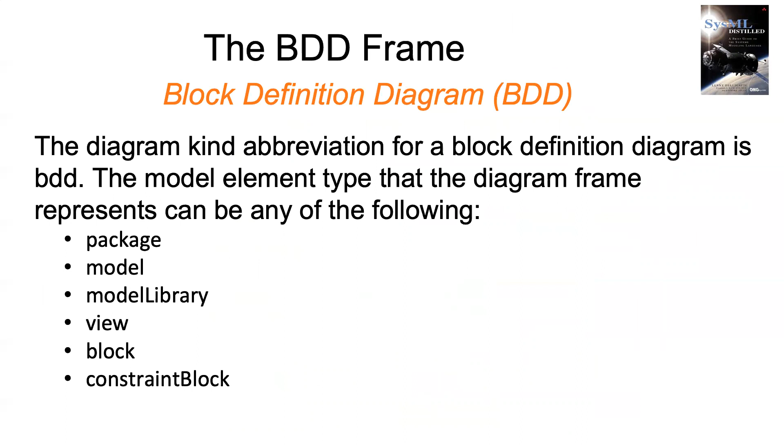A block definition diagram is used to display the properties and operations of blocks and the relationships between blocks. Common uses for BDDs include displaying system hierarchy trees and classification trees. The diagram kind abbreviation for a block diagram is BDD. The model element types for the diagram frame are package, model library, view, block, and constraint block.

So here is a high-level simplified BDD for the DellSat-77 that Delligatti has from his website, tied into what he has in the SysML Distilled textbook.

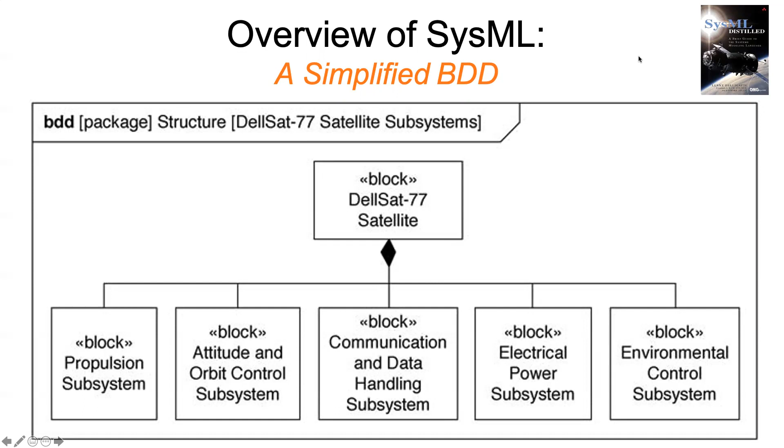And here are yet some other examples of the types of things that you could annotate with a block definition diagram.

Here are yet some other examples, going back to the DellSat-77. One is the structure, and we have a couple different ways of how that is represented here. This is the satellite structures and properties, and this is the structure trying to show a hierarchical view.

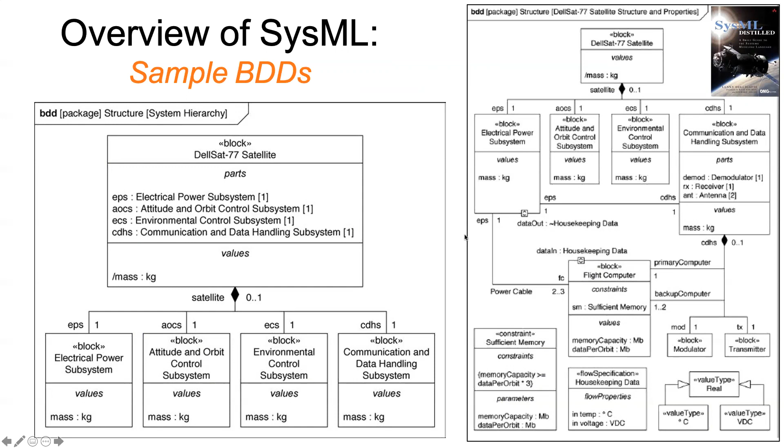And yet some other examples, I'll just skip over this, but these are other types of satellite-based structures that are used and shown in SysML notation.

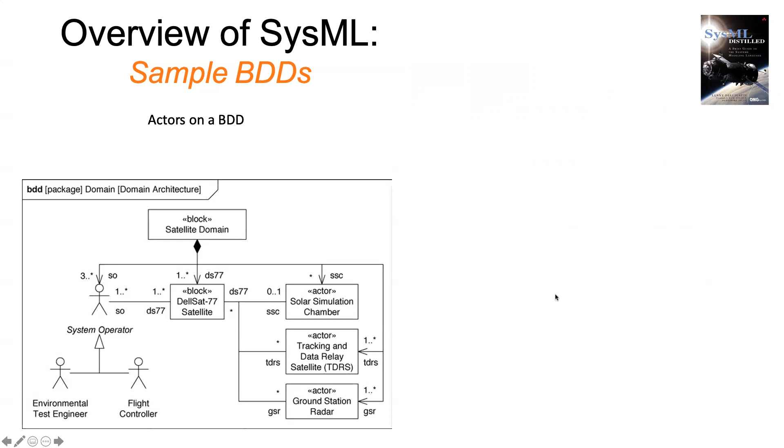You can also include actors in a BDD, and so here we're showing that. That may be something that would be useful to include for the way that you're trying to communicate and show the details of a specific design.

So for a summary of SysML, this is from SysML Distilled. BDD diagrams communicate structural information about a system. BDDs enable expressions of the structure type that exists internally within a system and externally in a system environment.

BDDs also express the type of services each structure provides and requires, the type of constraints each structure must conform to, and the type of values that exist within an operational system.

Generalization relationships between elements allow for defining type hierarchies and design to abstractions. This is a powerful design technique that creates extensibility in system design by decoupling the clients of services from specific implementations of a provider of those services. As the stakeholders' requirements evolve over time, one can modify existing providers or add new ones with minimal impact on the rest of the system design.

For an internal block diagram, it's used to capture the internal structure of a block, specifically its part properties and reference properties, and the connectors between those properties. An IBD always represents the internal structure of a single block.

So here is an illustration of an internal block diagram, once again for a satellite system, and this would be for a power subsystem.

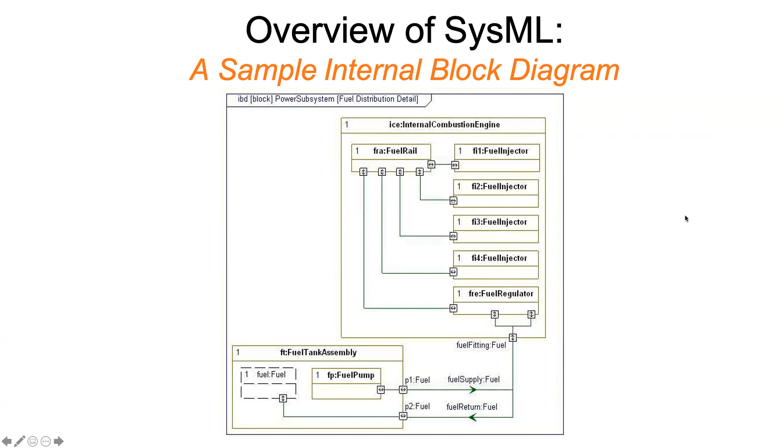Going back to the SysML, some of the things here—this is an internal block diagram for the satellite system that Delligatti has defined. And so this just shows you how that would work.

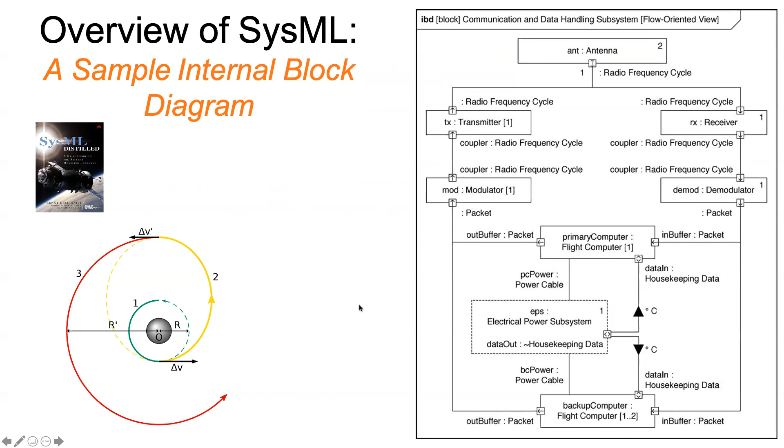Here is yet another example, a structure for a subset of blocks necessary for an IBD. The blocks necessary for an IBD of a communication data handling subsystem are shown here. This is one of the major subsystems that you would have in a satellite.

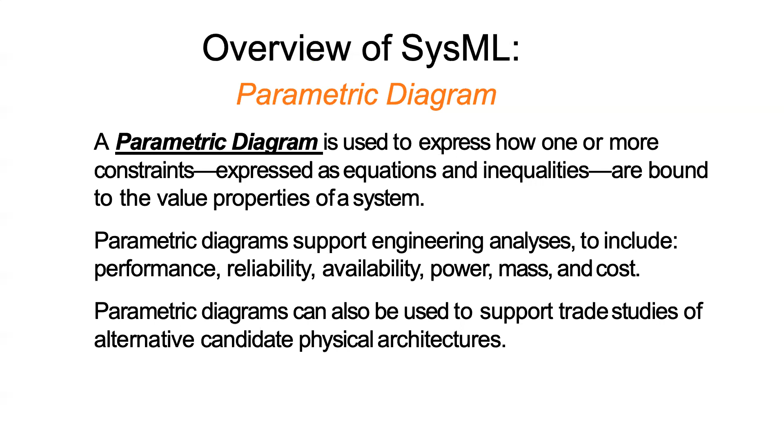A parametric diagram is used to express how one or more constraints, expressed as equations and inequalities, are bound to the value properties of a system. Parametric diagrams support engineering analysis to include performance, reliability, availability, power, mass, and cost. Parametric diagrams can also be used to support trade studies of alternative candidate physical architectures.

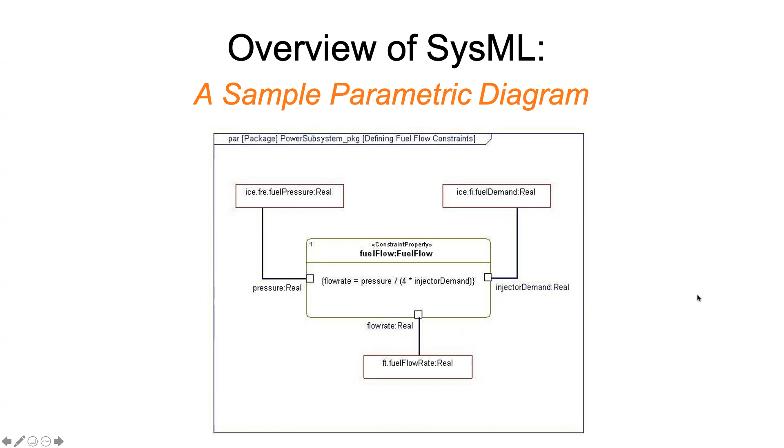A use case diagram is used to convey the use cases that a system performs and the actors that invoke and participate in those use cases. A use case diagram is a black box view of the services that a system performs in collaboration with others, so you're trying to see how the system is used in different scenarios.

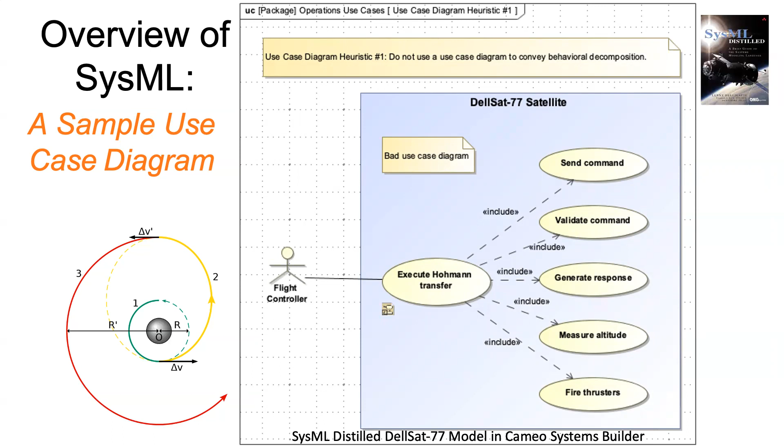Here's just another example, and this is for another one that is contained in the DellSat-77 model, and this is actually a view that I pulled out from when I was looking at the model in Cameo Systems Builder.

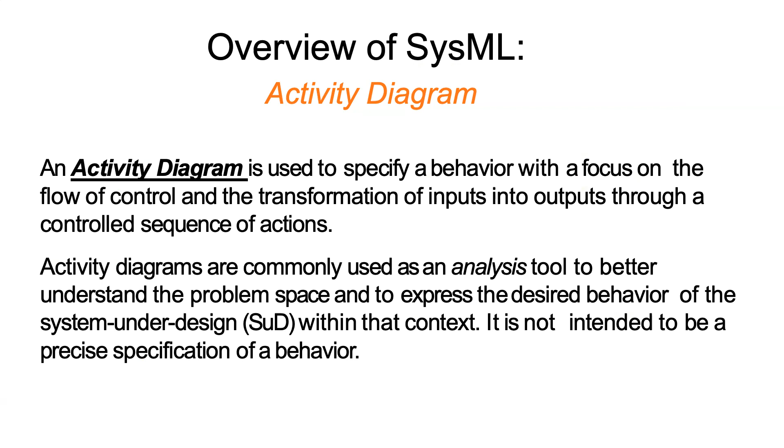An activity diagram is used to specify a behavior with a focus on the flow of control and the transformation of inputs into outputs through a controlled sequence of actions. Activity diagrams are commonly used as an analysis tool to better understand the problem space and to express the desired behavior of the system under design within that context. It is not intended to be a precise specification of behavior. So what communicates with what is a temporal flow of those things.

A sequence diagram is used to specify a behavior with a focus on how the parts of a block interact with one another via operation calls and asynchronous signals. Sequence diagrams are commonly used as a detailed design tool to precisely specify behavior as the input to the development stage of the life cycle. Sequence diagrams are also an excellent mechanism for specifying test cases.

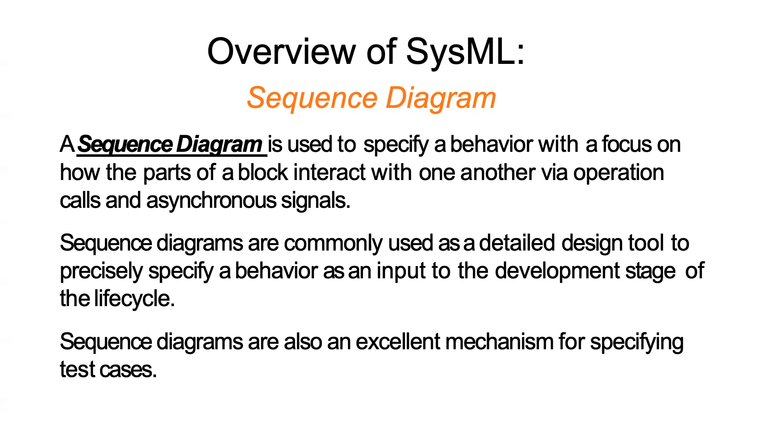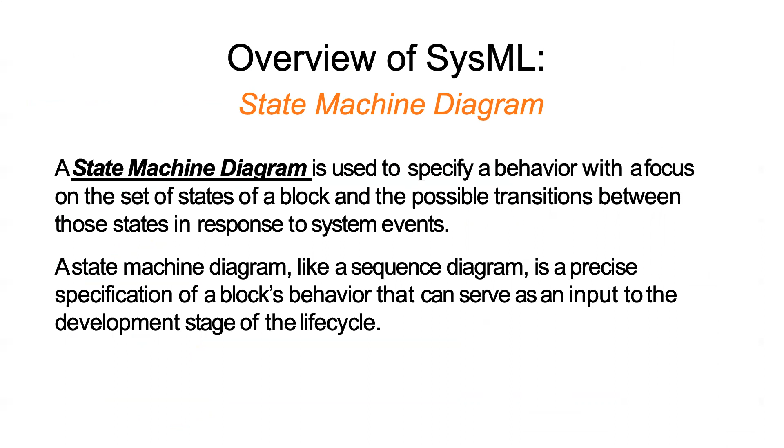For the state machine diagram, a state machine diagram is used to specify behavior with a focus on the set of states of a block and the possible transitions between those states in response to a system event. A state machine diagram, like a sequence diagram, is a precise specification of a block's behavior that can serve as an input to the development stage of the life cycle.

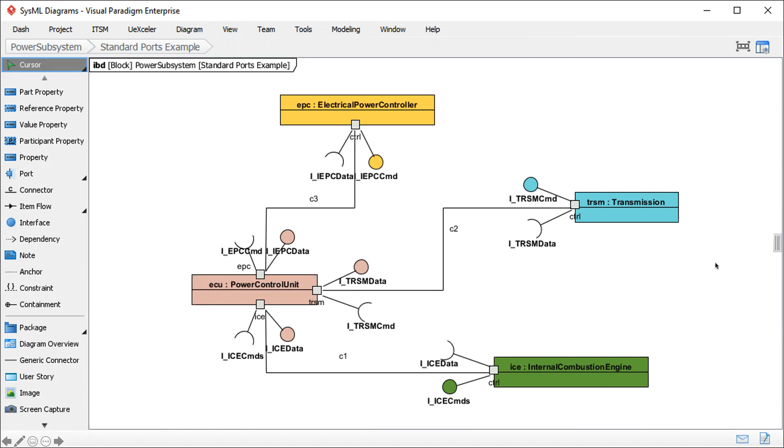For the internal block diagram, this is where we take a deeper look into a specific part of the design. Here is an example of that, where we have, say, a power subsystem with the electrical power controller, the power control unit, and other types of elements that are either inputs or outputs, connectors, as we're showing here, by each one of those elements in this diagram.

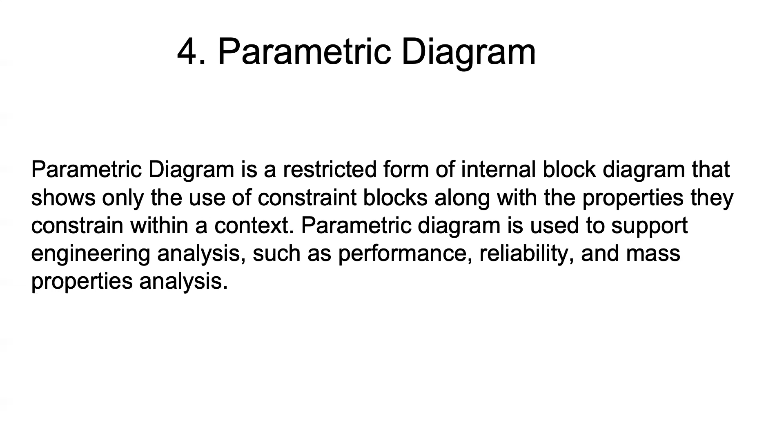For parametric diagrams, this is where we show the constraint blocks and the properties in which they perform. There are equations and physical realities that we're talking about, and this is helpful for engineering analysis. Here is an example for a power subsystem, showing a flow regulation of how much pressure can actually be passed through. We can see that these would be the physical quantities that we're embracing with this part of the design.

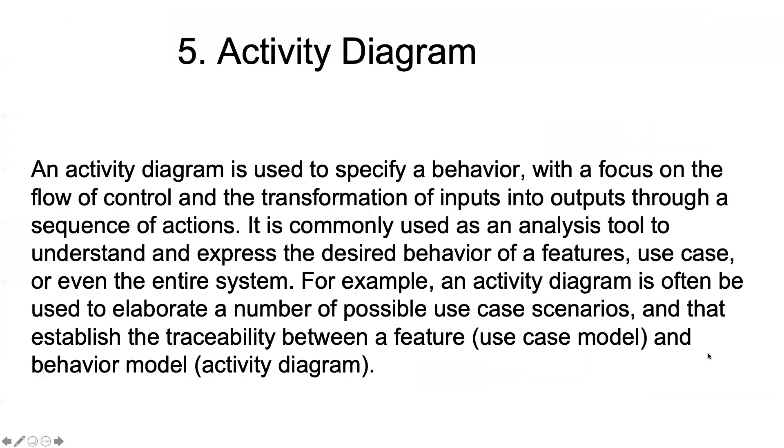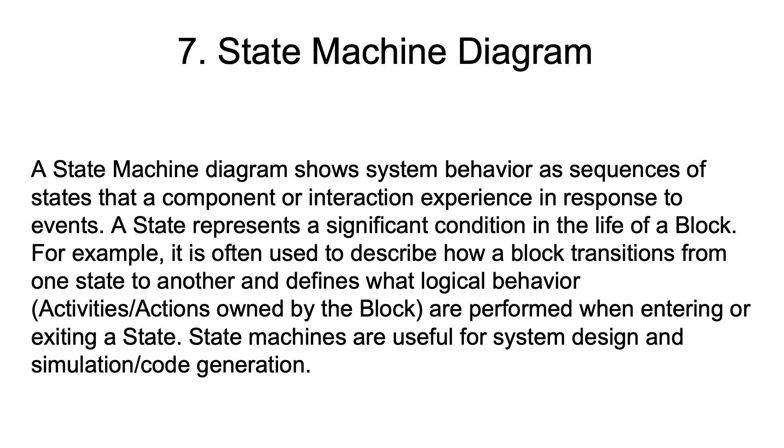For a state machine diagram, it shows a system behavior as a sequence of states that a component or interaction experiences in response to events. A state represents a significant condition in the life of a block. All of the states of a system are defined, the ways that you go from one state to another, the initial state and the final state — those are all things that can be shown.